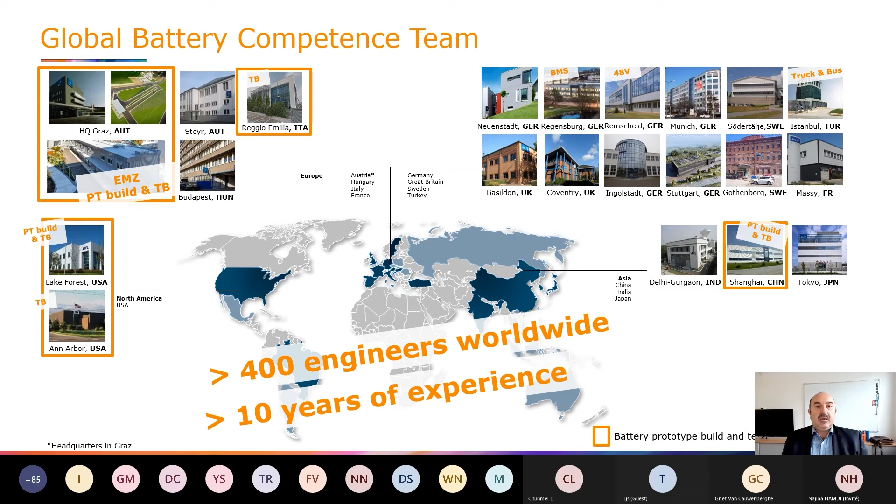Especially, the global battery competence team is spread nearly all over the world so that we can support our customers at close range. More than 400 engineers worldwide have been dealing with the development of electrical storage systems for more than 10 years, for all kinds of applications, but mainly focused on automotive applications, from two-wheelers to passenger cars and also commercial vehicles.

We can provide all the competencies that you need during a series development process of a battery system, starting from benchmarking and battery cell research topics, concept development at an early stage, different module and pack simulations, series development including battery management systems, and prototype build-up, as well as series production and cost engineering. That means we are able to deliver all elements from scratch to start of production for your battery system.

So now let's come back to the topic of today: what are the challenges and drawbacks that the automotive industry has to face in the 21st century? Of course, nearly everything is driven by the climatic goal. So I want to focus on the pathways to a clean and sustainable propulsion system that enables individual mobility in the future.

In terms of climatic and environmental goals, it is also important how we recycle and reuse the raw materials that are available only in a limited amount on our planet Earth. That is the reason why second life and recycling of components will play an important role in the future.

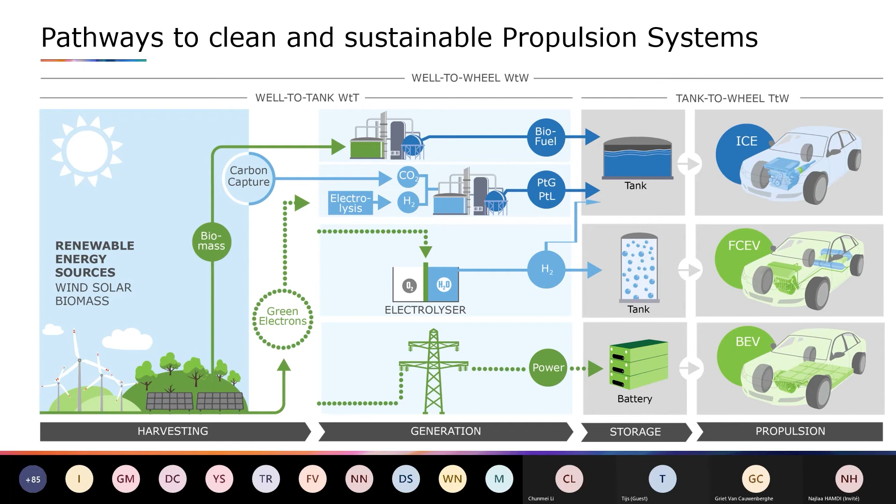After showing the demands, we will have a look at different topics: how to solve the requests of the public authorities. One of the topics will be the efficient usage of energy storage systems far after their automotive usage, in their first life.

Let's talk about the battery value chain. To do this, it is necessary to keep the entire life cycle of a battery in mind. It already starts with the raw materials and choosing the right chemistry.

It is not enough to just focus on the first life application, in this case the automotive application, but one must also consider the reuse or repurpose of the battery in a second life. Such a second life application could be energy storage in a family home, or in a battery farm of an energy supplier, to buffer energy in a power grid with decentralized production, for example from alternative sources like wind turbines or photovoltaic cells. If both seem not feasible, the last option is the recycling of the raw materials.

Large recycling facilities are established in Germany, Belgium, France, Finland, Norway and Sweden. Some work closely together with electric vehicle manufacturers. In order to stay competitive, standards that enable an automated dismantling process have to be set. Export restrictions on used batteries and the black mass are being discussed to secure access to raw materials for the European industry.

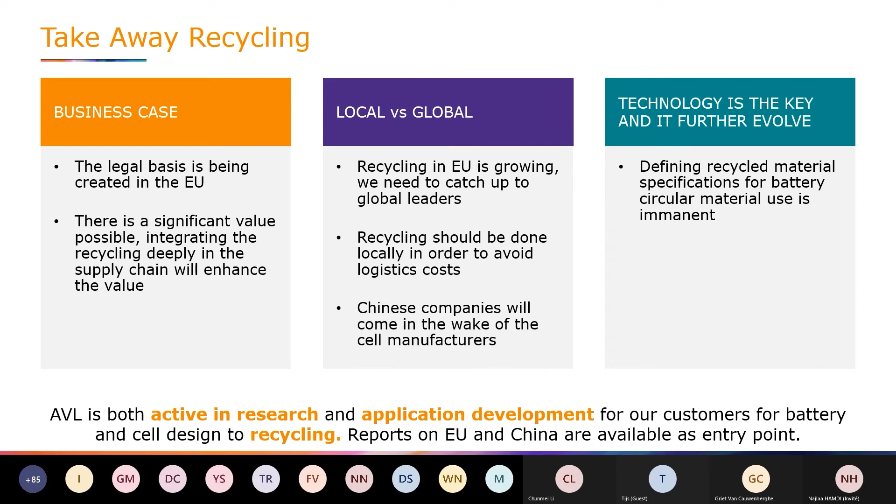In Europe, recycling companies will cooperate with the OEMs, and in China mainly with the cell suppliers. Specifications for recycled material have to be created. AVL is dealing with all these facts and is active in research as well as in real projects for customers. Reports on the actual situations are available.

So we have focused on the main challenges for the transformation of the automotive industry. After that discussion, let's now face the battery system and its complexity. To handle all these requirements is also a challenge.

If we take a look at the life cycle of a battery system, there are a few main stages. In the first life, there is an application in the automotive world. When the state of health reaches between 70 and 80%, the battery enters its second life, maybe in a battery farm for stationary applications or something else. In the end, it will be in the recycling process to bring all the raw materials back as efficiently as possible.

So the message is, we have questions to answer at all different stages along the battery life cycle, from producing the battery to recycling. We at AVL are involved in these activities and bring together these different worlds with our methods, testing and simulation.

Integration of different disciplines into a stringent engineering product with its large variety of requirements, depending on target markets all over the world, leads to a very high complexity that is not easy to handle. We have to deal with chemistry, electrics, electronics, thermodynamics, and of course mechanical design to achieve a product that can be used to reduce CO2 and play an important role in tackling climate change.

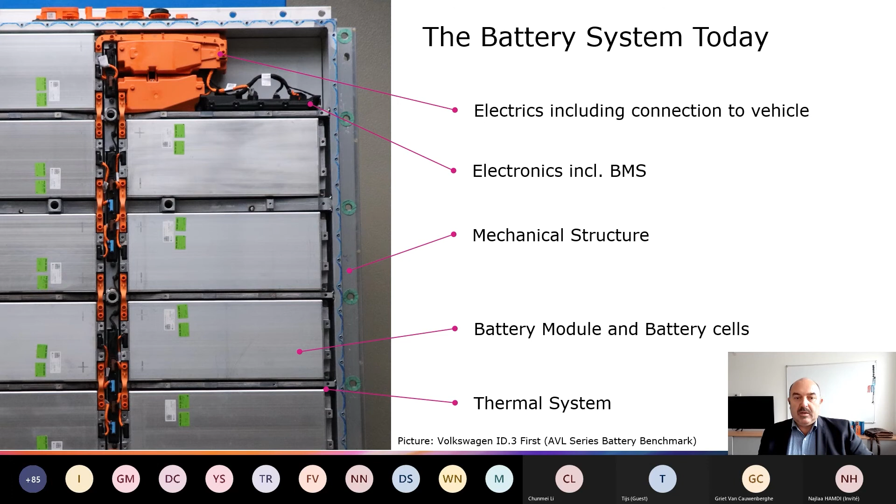Benchmark reports of these cars and batteries are available at AVL.

With the usage of solid-state electrolytes, we should solve a lot of the problems that we have with conventional lithium-ion batteries. We will be able to operate the batteries at higher temperatures. We expect higher energy densities and higher power capabilities. The lifetime and cycle times will be increased, and also safety issues will not be that dangerous anymore.

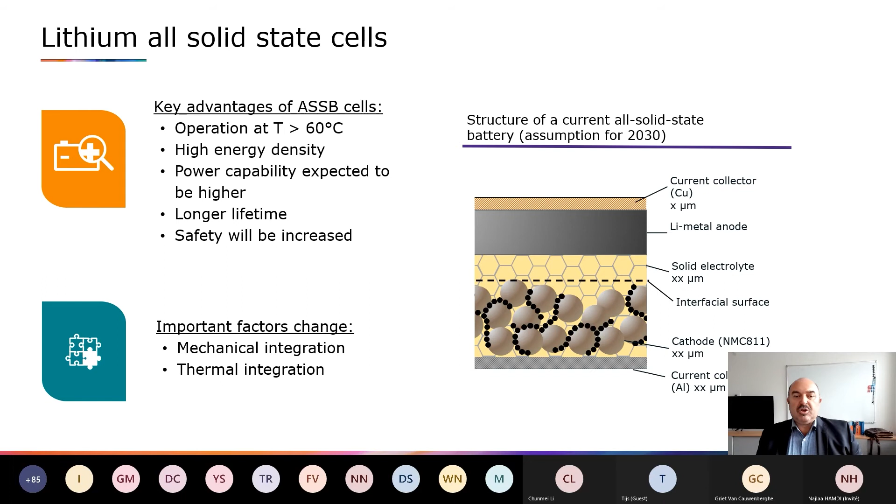But there are also important factors that we have to handle. We will face challenges in the integration of the cells, as well on the mechanical as on the thermal side.

With this technology change to all solid-state cells, we are facing some impacts on the integration strategy into a battery pack. Three topics I would like to mention. An increased breathing behavior will challenge us in the mechanical integration, as well as the pre-compression that we have to put on the cells. And as a third point, the higher operation temperature will challenge us in terms of insulation against the passenger cabin and sensitive parts in the car.

What can we do to handle this? We have to use different mechanisms, just like special compression pads, that can stand these strong volume changes in the cells. Of course, the mechanical fixation has to be strong enough to bear the pressure coming up by these breathing effects. Also, dynamical systems, mechanically or using isostatic liquid pressure, could be imagined, but seem to be much more complex.

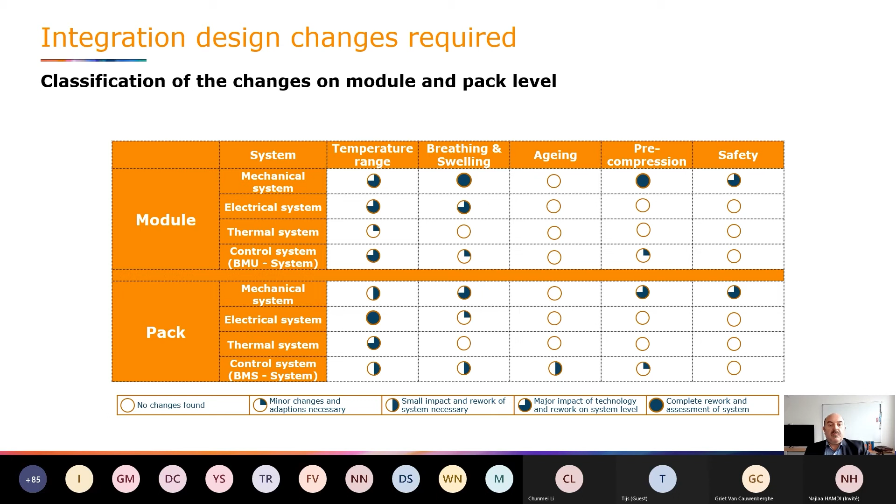So what can we take away as a challenge for the integration of solid-state cells into a battery? Solid-state cells offer different properties than conventional cells do, and so we have to adapt the whole integration process into an automotive application. As we described, a lot of changes have to be kept in mind to create the optimum operational environment. As the benefit, you will have the possibility to reach very high charging rates and high energy densities.

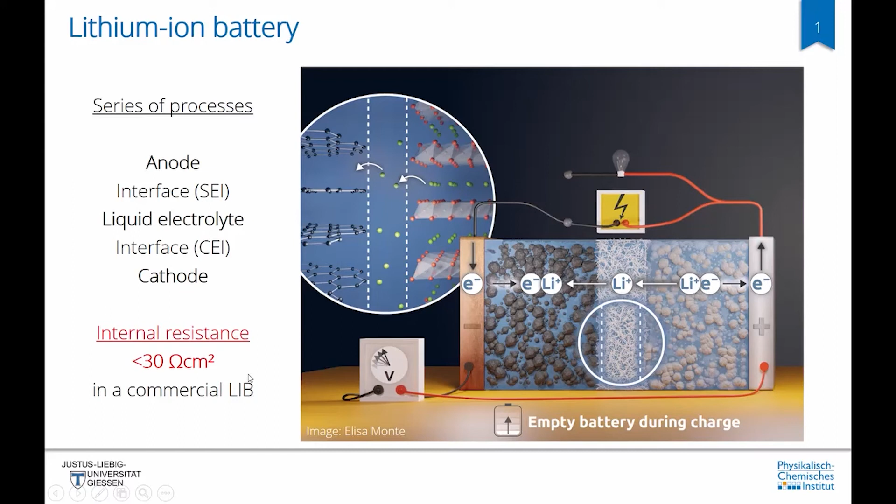First of all, of course, the lithium-ion battery, everybody is aware of how it is made up, but I would like to highlight the interfaces, which are key aspects in liquid electrolyte lithium-ion batteries as well as solid-state batteries. A value which is not always looked at so much is the internal resistance, which in commercial lithium-ion batteries typically is 30 ohm square centimeters or less, which means that if solid-state batteries are to beat this, the internal resistance needs to be as low or even better.

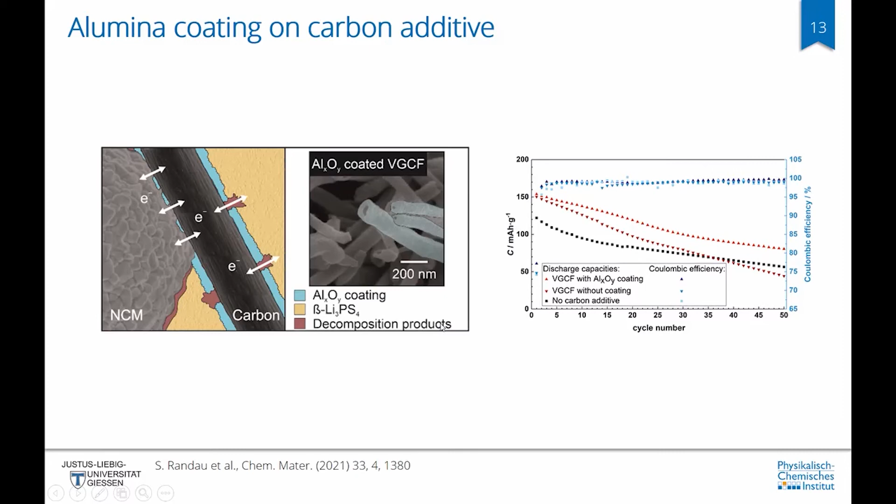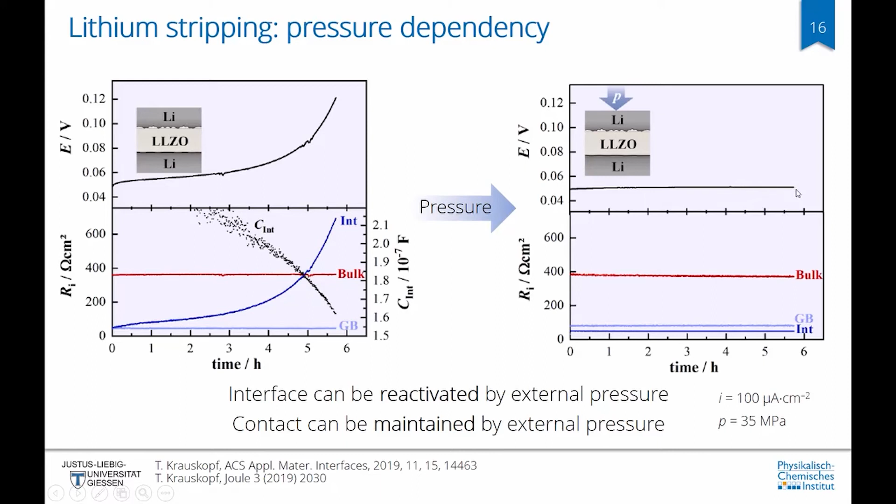Now, to prove that this is indeed mechanical separation, this can be reversed by applying pressure, and we re-obtain the original low voltage for lithium stripping, and this low voltage can be maintained by having an external cell pressure on the stack. Of course, the application of an external pressure is not ideal for applications.

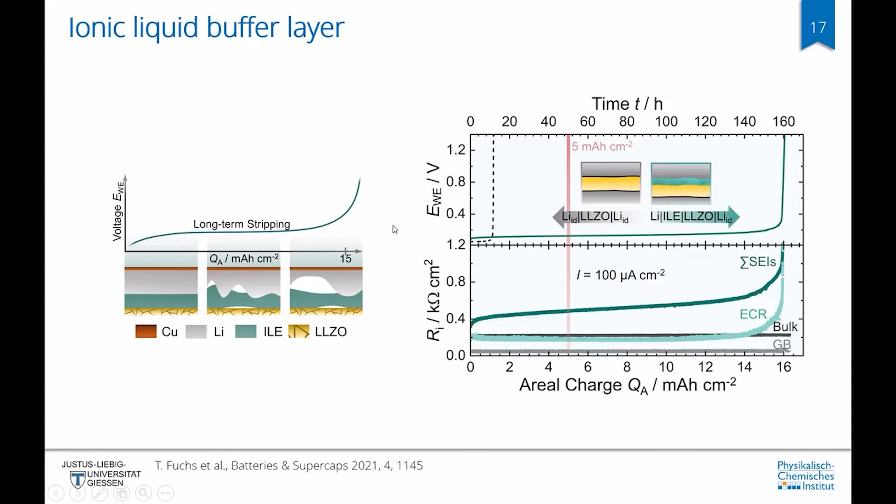Which is why Till Fuchs in our group investigated what could happen if we include an ionic liquid interlayer between the lithium metal and the garnet. He managed to show that the stripping can be much prolonged, up to 15 milliampere hours per square centimeter, when using this ionic liquid interlayer. Just to show the comparison here, on the left, this dashed line shows the cell with ideal lithium electrodes without ionic liquid interlayer, and the green line shows how much this can be extended, the stripping can be extended before the overpotential increases. With these results, we have a strong indication that hybrid systems will play a big role in future.

In summary, we have investigated the different forms of cell deterioration that can happen in a solid-state battery, to be the interface formation at the anode, dendrite formation, contact loss, and equally fracturing of cathode and contact loss and interface formation at the cathode active material, and propose as a view to the future that polymers can play a big role at these interfaces and as binders.

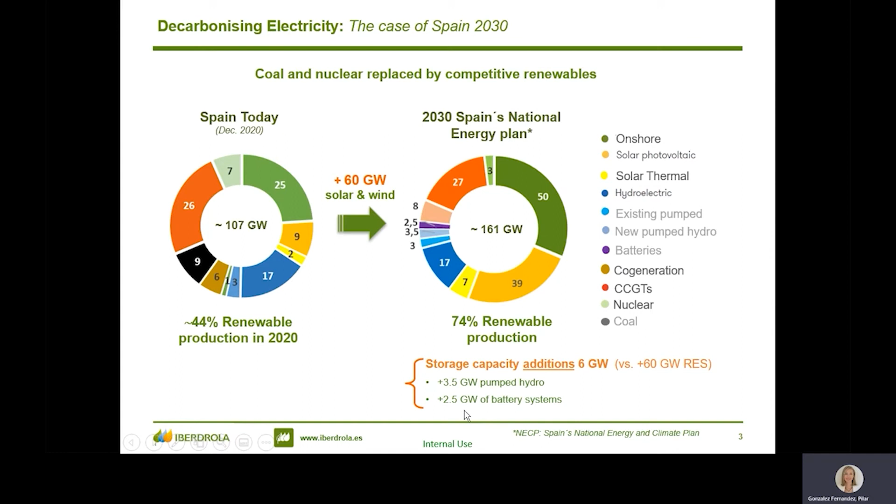And what is happening to lithium-ion battery demand? Well, this chart really explains it. We've plotted here the annual demand of batteries from 2017 to 2030, and the scale, which is the most relevant thing, is in terms of gigawatt hours per year. So it's a massive increase in battery production. And the reason behind this demand is the blue bar here, which are electric vehicles. So it's really the transport sector that is driving the demand for lithium-ion batteries.

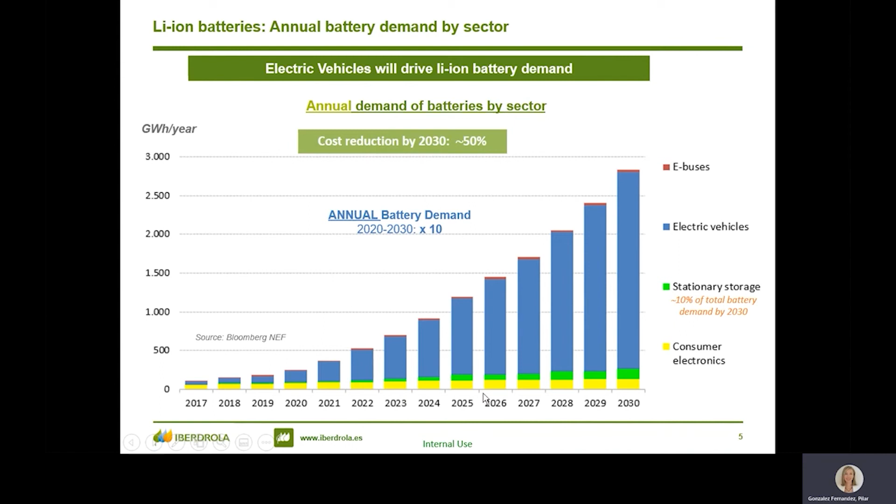Of course, batteries will be deployed in the grid by 2030 too - it's the green bars, stationary storage. Roughly this will be like 10% of the annual demand capacity by 2030 coming from the power sector. But although it looks very small here compared to electric vehicles, it's really quite large.

So what do we have in the power system in order to store electricity? We have different technologies, and the difference between them is really the different performance in terms of scale, duration, density, efficiency, and degradation. But in terms of large amounts, moving energy from one point to another in large volumes, there are only two technologies we can use today because of their maturity, efficiency, and cost - today, or perhaps in the next decade, like batteries. It's pumped hydro for long duration, more than 20 hours. It's a 100-year-old technology, very efficient, and it can be deployed at large scale.

And then we have batteries for short duration energy storage, below 4 hours. Today it's the most promising technology that we have. And it's in fact the quickest technology we have in the power grid, because batteries respond in less than milliseconds. So they are really the fastest technology that we have.

And where do we use these batteries within the power system? Well, really, we can use them almost everywhere, from the generation side to our networks, distribution and transmission wires, and also at our customers. But if we look closely into all these applications, we can reduce them into two, really: energy applications and power applications.

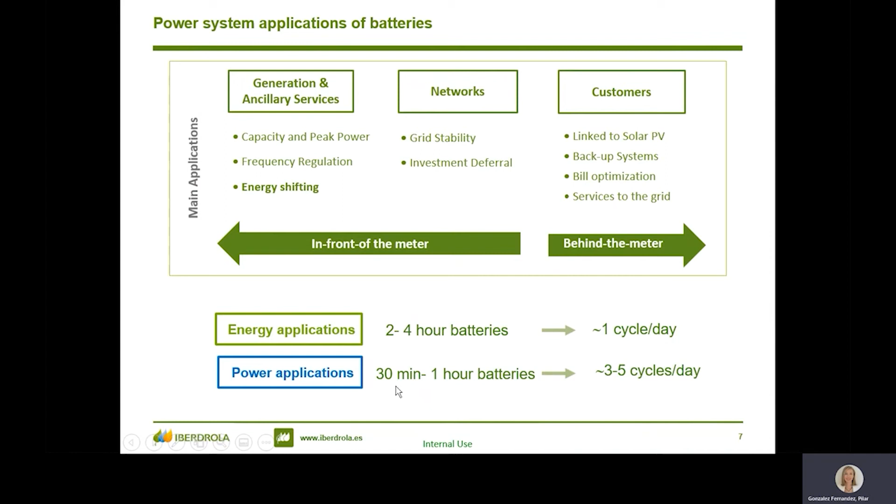So it's a great increase in demand for batteries. And this is just really the beginning, because beyond 2030, the share of renewables will increase and the need for energy storage will also increase. And of course, we cannot forget that despite electric vehicles, the batteries from electric vehicles go into another sector, they will actually be linked to the power system.

All these batteries are amazing. So when you add up the millions of the scale that is in terms of millions from the automotive industry, take for instance 15 million electric vehicles with a battery of 50 kilowatt hours, that takes you to an astronomical number of 750 gigawatt hours of storage capacity within those electric vehicles. So it's massive batteries that are connected to the grid.

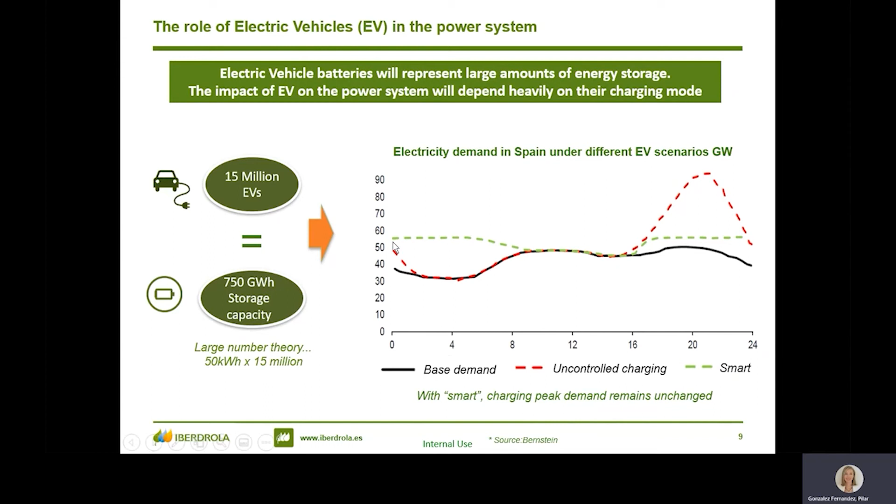And of course, we don't have here vehicle to grid, but it could also help in critical events for the grid, to take the power from those batteries back into the grid. But that will come in the next models from electric vehicles. So far, just by adjusting when and where you charge your electric vehicle, you just avoid any risks to the power system.

And let's take a look at what is happening in terms of technology. I'm sure you all know much more than energy companies do, but this is the way we simplify things. So what is happening in all these developments of batteries because of this massive demand is that we're seeing there is an interest in energy density, to increase energy density.

Also, we need to increase lifetime at the same time reducing cost. And of course, it has to be sustainable. So those are the developments that we're seeing in the battery technology.

But we shouldn't take for granted that depending on the application, we would need different performances from batteries. So electric vehicles would really demand great energy density cells and cells that enable fast charging. E-buses, on the other hand, are more concentrated on increasing life cycles. And for us, for power, for the power grid, for utilities, for stationary storage, we need a lot of life cycles, more than electric vehicles

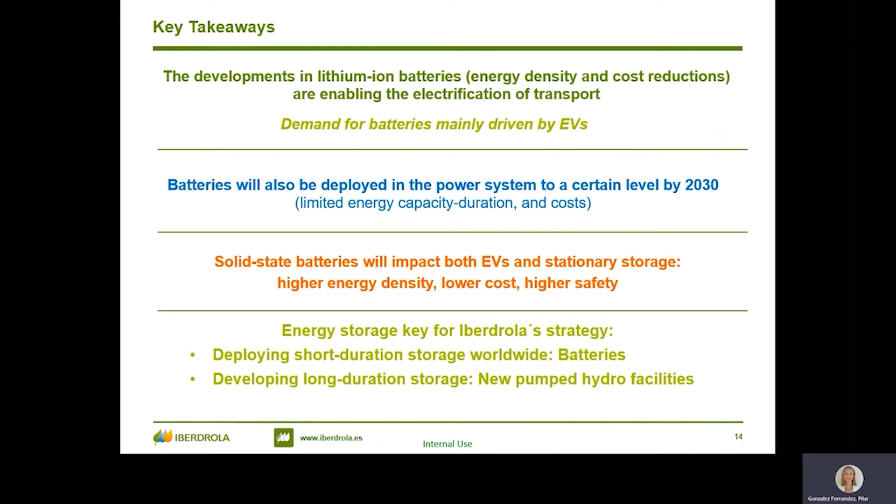And of course, for long duration, we cannot forget that we have this 100-year-old technology that is still evolving, and it's today by far the cheapest for long duration and for large amounts of energy storage. So thank you very much.

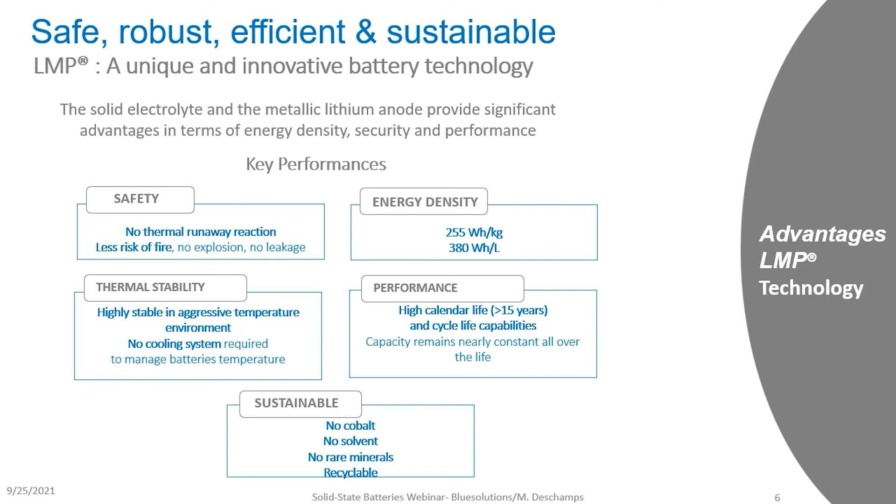Today, solid-state lithium batteries are universally recognized as the future of lithium batteries. Blue Solutions is the most advanced company worldwide in this technology and the first company to bring it to the market.

Made up of thin film using extrusion and coating techniques, this entirely solid electrochemical cell has neither liquid nor gel element and is a key component of the only commercial battery pack using a lithium metal negative electrode.

LMP is the assembling of only 4 foils. On the negative side, a lithium metal foil. On the positive side, a composite electrode made of lithium iron phosphate, carbon, and electrolyte. This cathode is linked to an aluminum current collector. Between positive and negative side, the separator, a lithium salt dissolved in PEO-based polymer.

Now let's have a look at the process to make cathode and electrolyte. First, we are making the cathode film. In Brittany, we are using extrusion, and in Canada, they are using coating.

The French process is represented here. A twin screw extruder is used to mix the raw material and melt the polymer. We obtain a foil after the barrel.

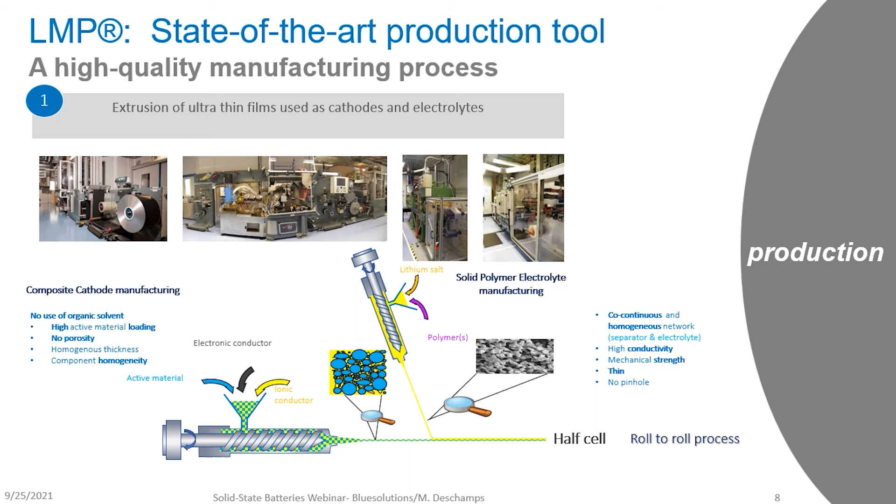To make this separator, we are using two different polymers, one for ionic conductivity and the other for mechanical strength. We need to make a co-continuous and homogeneous network, as thin as possible, but with no pinholes and homogeneous thickness. At the end, we have made what we call a half cell.

Let's go to the negative side, the anode side, the lithium side. I have to mention that parts of this process are not presented here. The raw material is lithium ingots.

The press extruder is used to make a film. The objectives are to obtain high lithium purity with no pollution. Thickness of 20 microns is the minimum we can reach today. Smooth surface and homogeneous thickness all over the roll.

After the film fabrication, it is time to assemble them. Lithium anode and half cell are laminated together, then cut and stacked. The electrochemical cell is made. By adjusting the laminate number, we can adjust the capacity.

Once we have the cell, they are connected in series and inserted in a sealed aluminum can. Electronic board and heater are added to create the module.

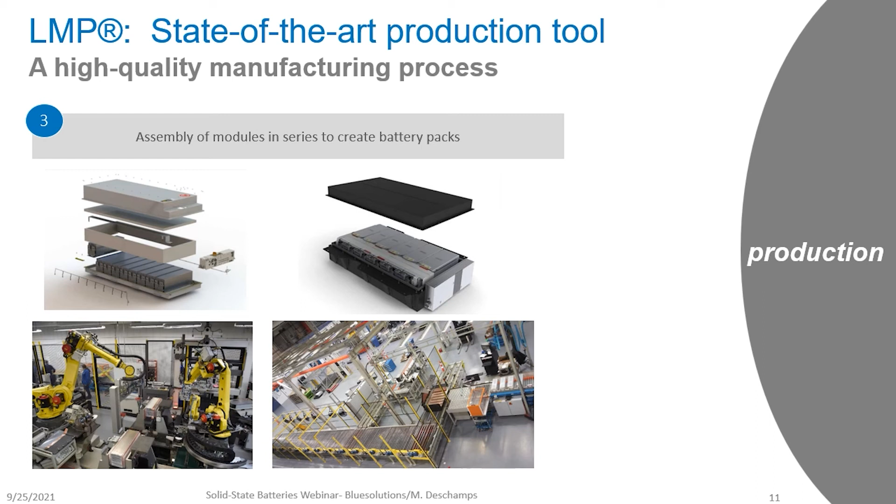LFP voltage is around 3.5 volts. We are connecting 20 cells to reach 70 volts for the module. After that, we connect 6 modules in series to make a pack of 400 volts, or 9 modules to make a pack of 600 volts.

To summarize, at Blue Solutions we start by transferring powder and finish by making pack and rack at a high level of quality. It seems easy, but moving from laboratory to industrial level is a long way with many challenges. Behind LMP and the original idea of Michel Armand, there is a lot of know-how, specific tools, and patents.

Today, Blue Solutions continues to focus its investment on boosting production capacities and R&D. We expect considerable investment in production capacity in Brittany and Quebec to support the expected growth in coming years. We will sustain R&D efforts to maintain our major competitive edge in the future generation of solid-state battery.

We have 3 main focuses for the next years. On the current technology, based on lithium iron phosphate and PEO, the main goal is to improve energy density. We expect to have a module of 9 kWh in 2025 compared to 7 kWh now. We are also developing a new generation called Gen 4.

I'm Steve Visco, CEO and CTO of PolyPlus Battery Company. Today I'd like to walk you through some of the challenges in transitioning solid electrolyte-based technologies to the commercial market. Virtually everyone has seen announcements like this announcing the end of the internal combustion engine. Although that hasn't happened, many auto companies have taken major steps toward introducing EVs to the commercial market. But along with these types of announcements, you've also seen things like the GM recall over the Bolt, due to a battery concern—fires. So safety becomes and has been a big part of electrification of transportation. Now that we're pushing for even higher performance, it raises the question: how do we develop the next generation of high energy density batteries without compromising safety and certainly without increasing cost? So many people have claimed that the future is solid state.

Polyplus is certainly working in this domain as well. So what about solid state batteries?

It's likely and almost certain that as we move to solid state, that will also involve a transition to metallic lithium for the negative electrode. And the reasons for that are obvious: lithium is 4 times the volumetric capacity density of carbon, and more than 10 times the gravimetric capacity density. So there's a big jump in performance if we can do this. In fact, if this is successful, that's kind of the end of the development of a negative electrode, because lithium is as good as you can get.

So as we move to the solid state, that necessarily means we're replacing liquid electrolyte with solid electrolyte. And that requires a number of key metrics. We need high lithium-ion conductivity at room temperature and hopefully below. This solid electrolyte should block lithium dendrites and be either thermodynamically or kinetically stable to lithium. And you want a low-density material, because otherwise this passive component will be adding a lot of weight to the cell, which you certainly do not want.

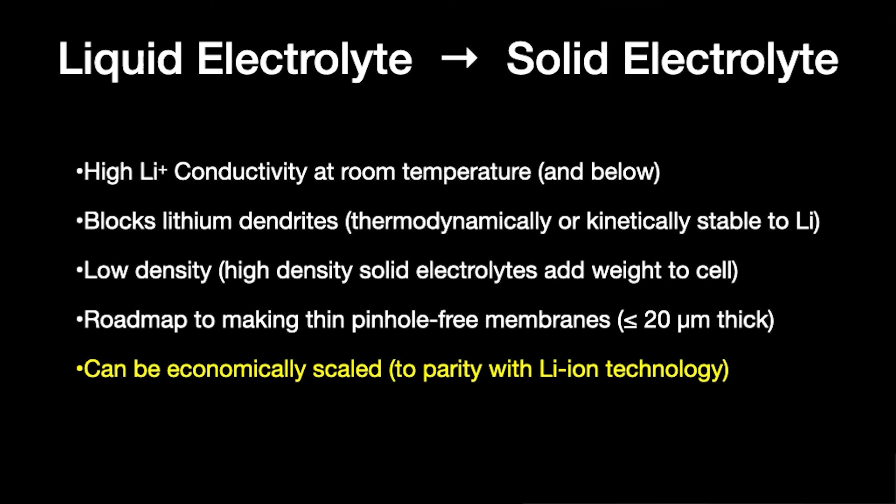There needs to be a roadmap for getting to very thin materials, hopefully below 20 microns, and they need to be pinhole-free so lithium does not short the cells. And obviously, ultimately, it needs to reach parity economically with lithium-ion technology. That's a big challenge. So let's look at some of the possible paths here.

Clearly, polymer electrolytes are one, and these are commercial lithium polymer batteries. It has a big advantage of being high-speed roll-to-roll manufacturing. Polycrystalline ceramics are getting a lot of attention; that's typically done through tape casting. And glasses are also a high-speed roll-to-roll manufacturing process. Anybody carrying a smartphone has a very thin glass display, and those are produced at scale at very high volume.

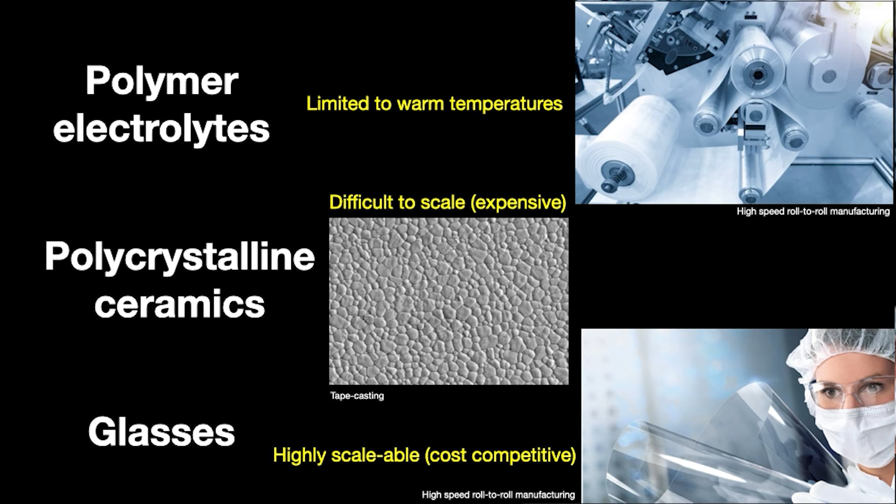So what are the downsides? With polymer electrolytes, they're typically limited to warm temperatures, right? The conductivities are not very good at room temperature and certainly not below. Polycrystalline ceramics have advantages electrochemically and mechanically, but this is a difficult technology to scale, and it tends to be expensive. Glasses are already scaled, so they scale similar to polymer electrolyte. So there are some big advantages to glasses.

So let's first look at polycrystalline ceramics, because Polyplus works extensively in this area. We work with a material known as LATP, lithium aluminum titanium phosphate, which is a water-stable solid electrolyte. So we can build lithium metal electrodes which can be fully immersed in water, and that allows us to build some very unique battery chemistries.

If we're going to take that to a rechargeable, the metrics change, the cost changes, but at this capacity density, the cost of the solid electrolyte is fine—it's economic in this range. It will change if we start talking about rechargeables. So this is still the most expensive component of the lithium seawater battery.

And the lithium seawater battery, as I mentioned, allows us to do some remarkable things, which is to build batteries at 2,000 watt-hour per kilogram, 1,000 watt-hour per liter.

Polyplus now has a pilot manufacturing line in Berkeley. We're about to launch this commercially. And we just completed deep water testing—we had our batteries at 13,000 feet in the ocean, very high pressure. But these are incompressible electrodes, so they do not need to be protected from those high pressures. We can do some pretty remarkable things there with the solid electrolyte-based chemistry.

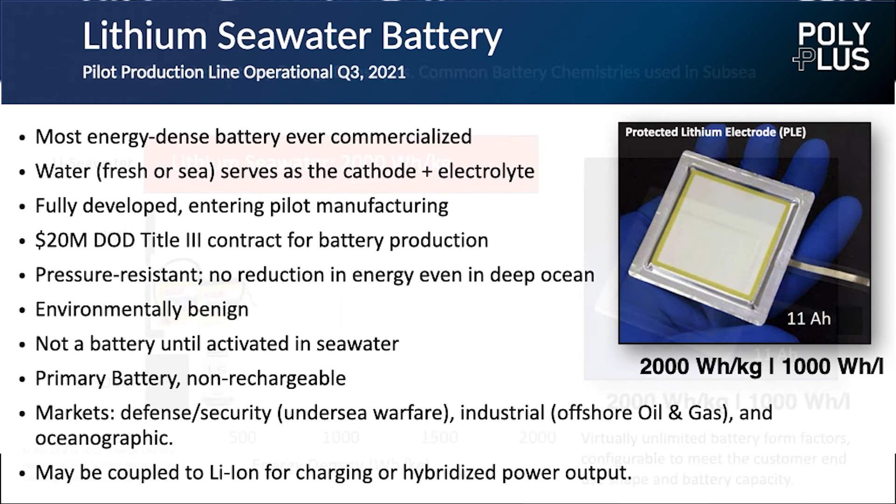If you look at other batteries used in deep ocean applications, they have to be protected from pressure, so their energy densities are vastly derated. Ours, of course, are not. They're not even close.

Lithium seawater, as I mentioned, has already demonstrated upwards of 2,000 watt-hours per kilogram and 1,000 watt-hours per liter, and we can probably push that a bit higher. So that is going to go commercial.

Let's get back to this idea of which solid electrolyte we're going to choose for a particular application. In the seawater battery, we have very high capacity density. When we move to rechargeable batteries, the capacity of the positive electrode is typically in the 3 to 5 milliamp-hours per centimeter squared. That's a very different domain.

It means that a rechargeable battery will require 3 orders of magnitude more surface area than what we're doing in, for instance, our lithium water battery. That means the solid electrolyte would then be 1,000 times more expensive. For us, that would be a showstopper, which is why, as we moved in the development path for rechargeables, we took a different path.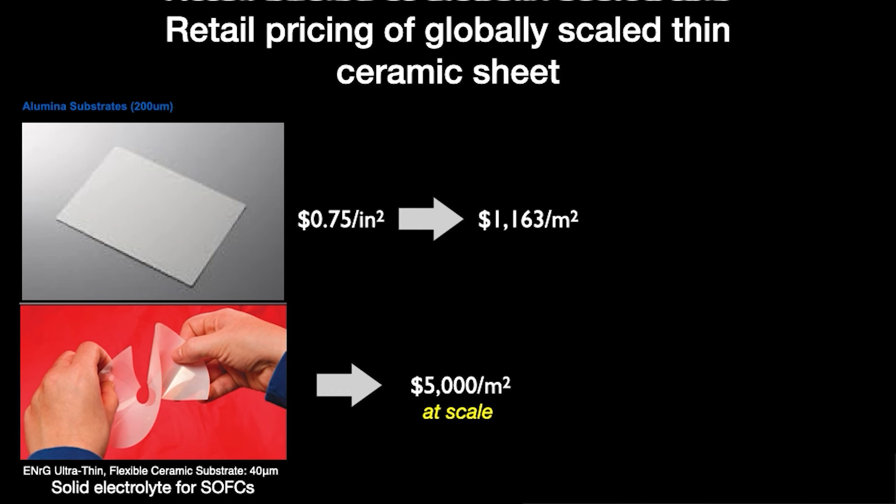We work with this LATP material - here you see a 40 micron membrane. We typically don't work with such thin materials because the seawater batteries don't need them. They're very expensive, so we don't see this as a path forward because of the scaling issues and the cost. There are other issues regarding dendrites too, but the cost issue is a big one.

Solid-state batteries have been around. Some work came out of Oak Ridge National Lab years ago, where they actually sputter deposit the battery - sputter deposit LCO, sputter a glass, and then deposit lithium on top by evaporation. Remarkably, these batteries were commercialized. Several companies did it at a commercial spec of about 10,000 cycles at 100% depth of discharge.

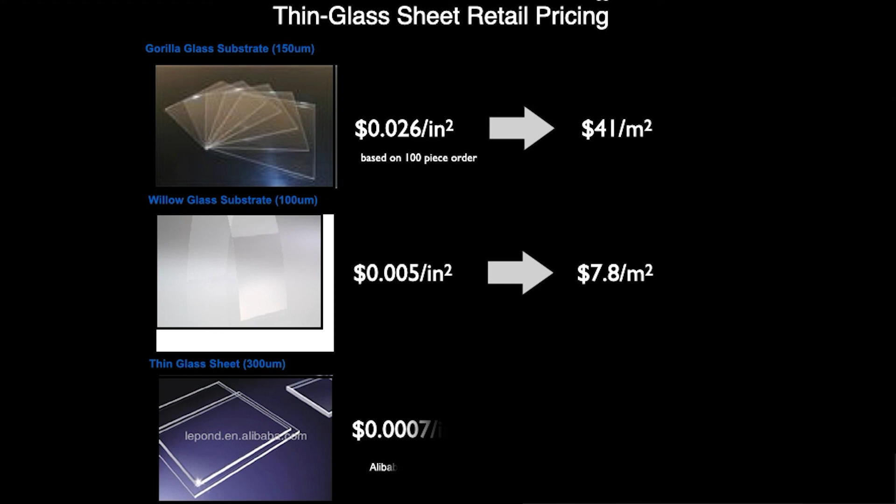If you go on Alibaba and look at Chinese glass suppliers, you'll see prices as low as $1 per meter squared. So these are certainly scaled at the kind of price points we're interested in for commercial batteries.

The conductivity of sulfide glasses is very high. Even at minus 20 C, the conductivity is at 10 to the minus 4 Siemens per centimeter. These materials are sufficiently hard to stop dendrites. In fact, the elastic modulus of this glass approaches that of oxide glasses, so these are strong glasses.

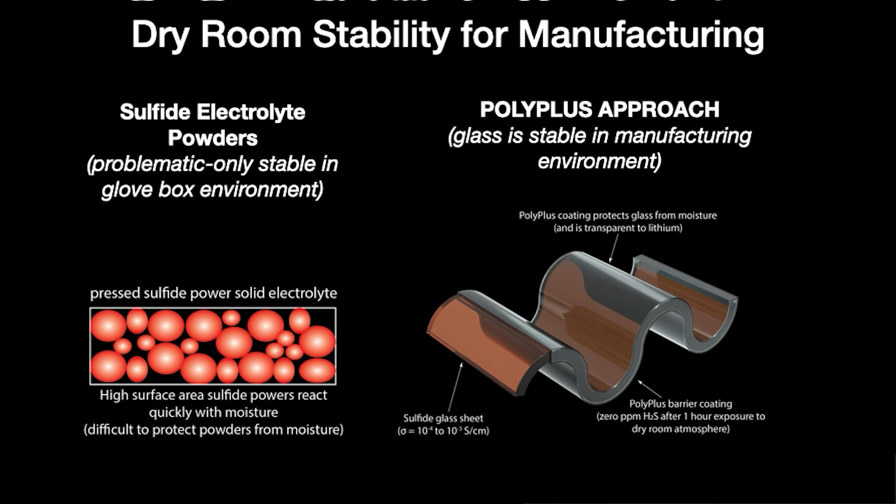We've also developed a process to stabilize these glasses against dry room environments. If you look at the Toyota approach, where high surface area sulfide electrolytes are compressed with either anode or cathode materials, it's difficult to protect those against moisture because of the high surface area. But we have ribbons of material which can be coated very simply. We use a barrier coating which is transparent to lithium but blocking to moisture. So we have that process in-house.

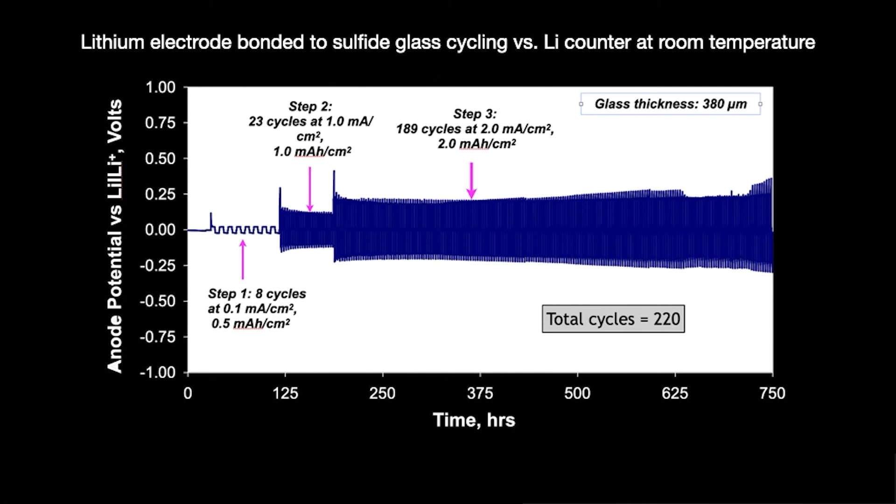We cycle these. Most of these glasses have been cycle tested in small cells, and we're getting ready to do larger cells. You can see here that after 200 cycles, the cycles basically fall right on top of one another. Here's some extended cycling of a 400 micron thick glass - you can see it's very reversible, and we don't see any evidence of dendrites.

We also cycle these glasses against NMC 622. We see very good capacity retention there as well.

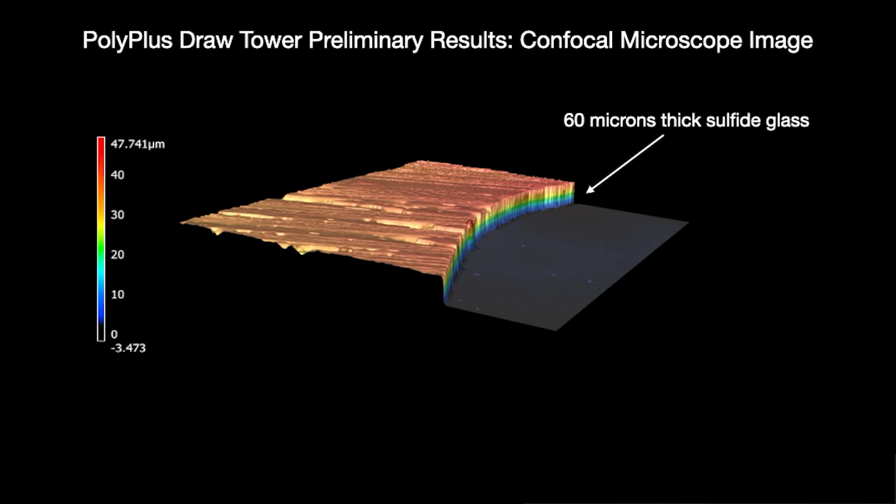If we look at the glass coming out of the draw tower with a confocal microscope, you can see that we very quickly get down to 60 microns, and pulling a little further, we're in fact pulling glass down all the way to 15 microns thick. That is an ASR of about 2 ohm centimeters squared.

So the end goal is to commercialize the material in a form like this, where we have sulfide glass, very conductive, coated with a thin layer of lithium metal, which is then used to build next generation batteries. Each one of these processes, including putting down the lithium, is economic, so we think ultimately we can get to parity - but of course, you never start there.

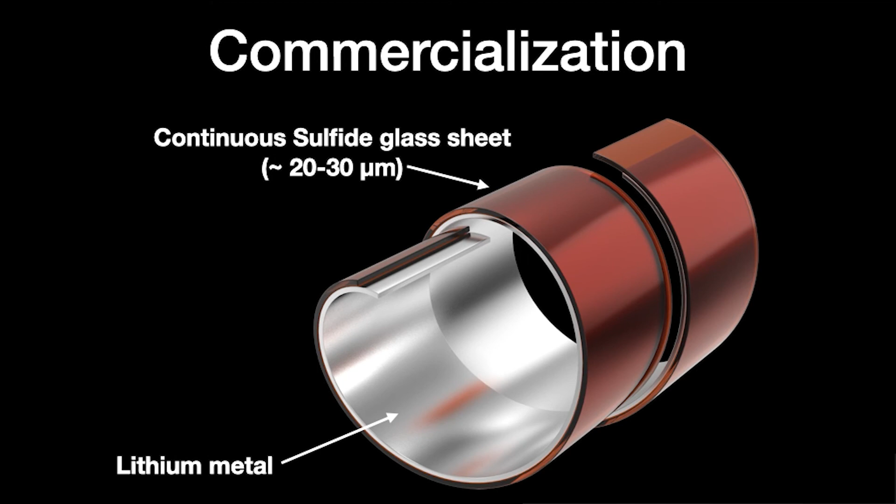So I'd be happy to answer any questions, and that I will end my talk right there.

So I think I don't need to emphasize the importance of solid-state battery and how much interest we have received so far from both academia and industry. But from this worldwide battery target roadmap, I just want to emphasize several programs, including Battery 500 in the US, Made in China 2025, and Rising II in Japan, not to mention the Integrated Strategic Energy Technology Plan in Europe. As you can see on the right-hand side, all solid-state battery technology is just one of several being discussed. So if we look at the different technologies, they have different future trends.

Battery usage is really application dependent. Here we mainly focus on lithium-ion batteries initially, and especially electric vehicle applications. From state of the art, we gradually move to high nickel versions like NMC 811, NCMA cathode materials. We also have silicon anode, and so the composite anode. There is another direction, which is to go to solid-state batteries, including both polymer and inorganic choices. Lithium metal anode is also a very important component. These technologies are not exclusive to each other, so a solid-state battery could go with a silicon anode or lithium metal anode.

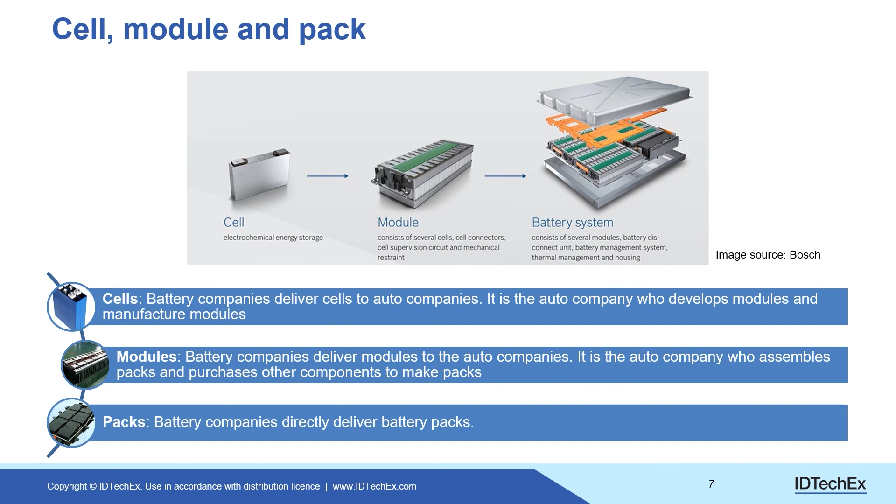Coming to the commercial area, we always ask: where is solid-state battery? From the technology readiness level, most startup companies and battery companies with divisions working on solid-state battery are mainly in the technology development stage, early pilot, and scale-up stage. From basic research and development to mass production usually takes several years. Most companies are mainly in the sample line, R&D stage, and test pilot line. That is why we wouldn't expect mass production to happen before 2025.

In terms of cell manufacturing, there are lots of options. A really important consideration is compatibility with existing facilities, because that affects cost and complexity. For instance, the anode material usually involves handling of lithium metal.

Both procedures add complexity and create challenges compared with lithium-ion processes. In addition, because we probably don't really need formation and aging processes for solid-state batteries, some manufacturing procedures could be reduced or even omitted. But from lab to fab and to mass production, there are lots of details we need to consider. Cost reduction, yield improvement, and quality control are also important factors.

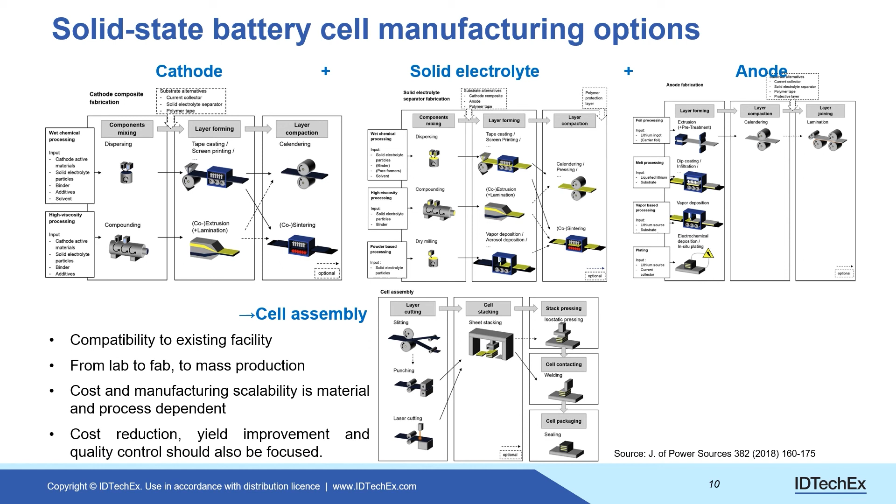There are different choices in terms of technology and procedures, because they are really technology and chemistry dependent. For instance, you may need really high temperature for the sintering process for oxide electrolyte, while for sulfide-based electrolyte, inert gas conditions may need to be applied. That is why we think it's really important to give an analysis of the different technologies.

If we look at the different value propositions of solid-state battery, we talk a lot about energy density, because of the possibility to use lithium metal anode and high voltage cathode. Of course, safety is a really attractive factor because we don't really use flammable organic electrolyte. Although for polymer solid-state batteries, it may not be the case - the safety could be improved, but there are still some flammable components remaining.

Because of eliminating the capacity loss process, it is possible to increase cycle life. And of course, people may talk about the potential low cost because some components could be reduced or removed. Flexible design is also a really important consideration, both for non-electric vehicle applications like consumer electronics, and in series and parallel configurations. But in the meantime, there are also lots of challenges.

For instance, if we just replace the electrolyte, as we discussed before, it's not necessary that we get a better energy density. Most solid-state batteries, because of higher internal resistance and worse interfacial compatibility, have charging speed that could be difficult to improve. Although we can see some players have demonstrated 80% capacity after a 15 minute charge.

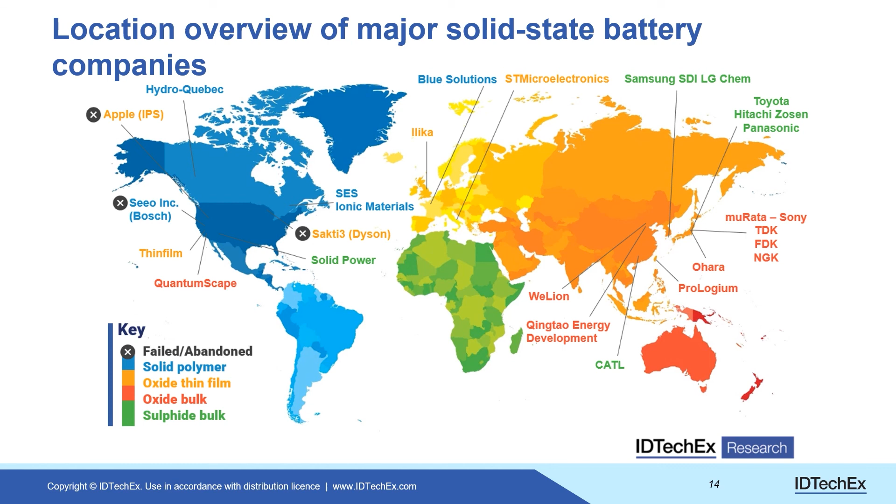Here you can see lots of players working in the solid-state battery area globally. Although some players have abandoned the technologies, others gradually move to alternative technologies. There are also some companies, for instance, that move from sulfide-based to oxide-based. In general, we can see lots of recent activities with different companies in this area.

The general message in this area is we can see a growing number of collaborations, partnerships, and joint ventures. The major targeting application is electric vehicles, although other applications may become easier to realize. So here we can see the key takeaways include the technology trend, challenges, and also market trends.

Because this is a really short presentation, if you are interested in more details, we have a report on this topic, and I'm also happy to discuss any questions with you. Thank you so much.

Thank you very much, Xiaoxi, for this comprehensive view around solid-state battery technology. In your opinion, how the most likely business model around this technology could be? I mean, who will dominate the solid-state battery commercialization? Will it be current lithium-ion battery makers? Will it be startups? Will it be a collaboration or partnership between automotive manufacturers and these small startups? What is your opinion about this?

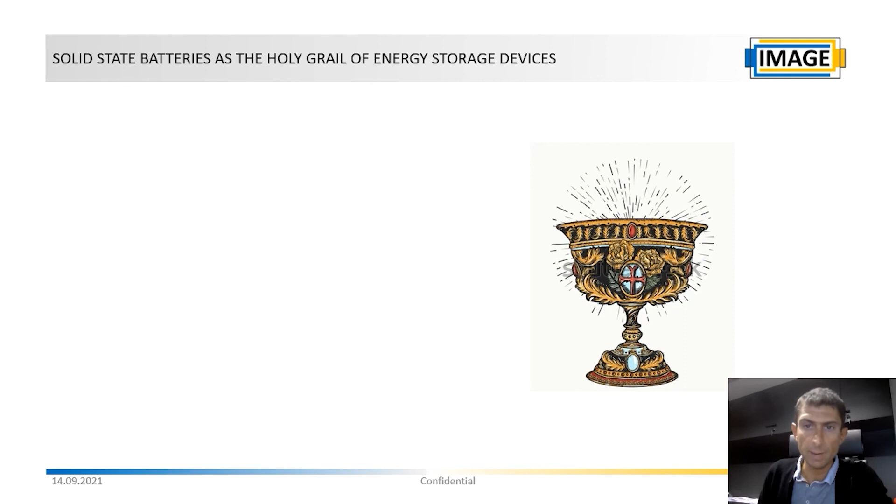Solid-state batteries are still seen today as the holy grail of electrochemical energy storage devices, for which all the desires in terms of market indicators can be fulfilled at once: high energy and power densities, long operational lifetimes, low cost, and no issues related to safety. This is the most recurring dream for battery manufacturers that could become a reality with the manufacturing of solid-state batteries.

In short, when we talk about solid-state batteries, we refer to the possibility of replacing the flammable liquid electrolyte of standard lithium-ion batteries with thin solid films that also enable the use of high specific capacity anodes such as lithium. Thanks to this, we can expect better performance mainly in rate capability, energy density, and safety. But the reality is somehow different, and up to date, at least, I'm not aware of any commercially available device with this technology that outperforms the standard lithium-ion batteries we can find today.

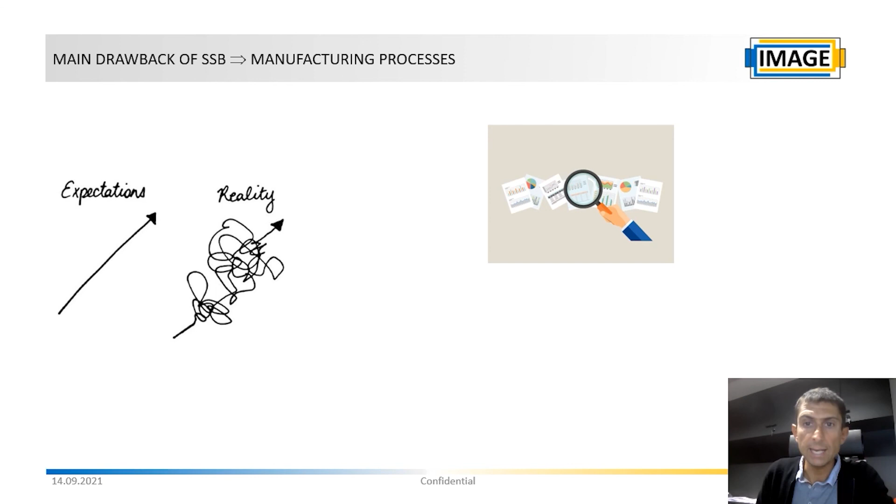We'll see what the future brings. It is true that the development is still in a very early stage, but in any case, any competing technology will have to be evaluated or benchmarked against existing ones in terms of performance, manufacture, and scalability to fulfill market demand and price.

So far, the fabrication of this kind of device is the most limiting factor, since performance and cost are supported by the very active research and development on novel materials with better electronic and processing properties. In contrast, there doesn't exist an industrial manufacturing technique able to produce the gigawatts we would need for either mobile or stationary applications. I don't want to get into too much detail with this.

The important issue here is that it doesn't really matter what the electrode is made of. Every material has its positive and negative features, but the fabrication process has to be somehow consistent and independent of the kind of material. And how does this process have to be? Well, that's what I'm going to talk about today.

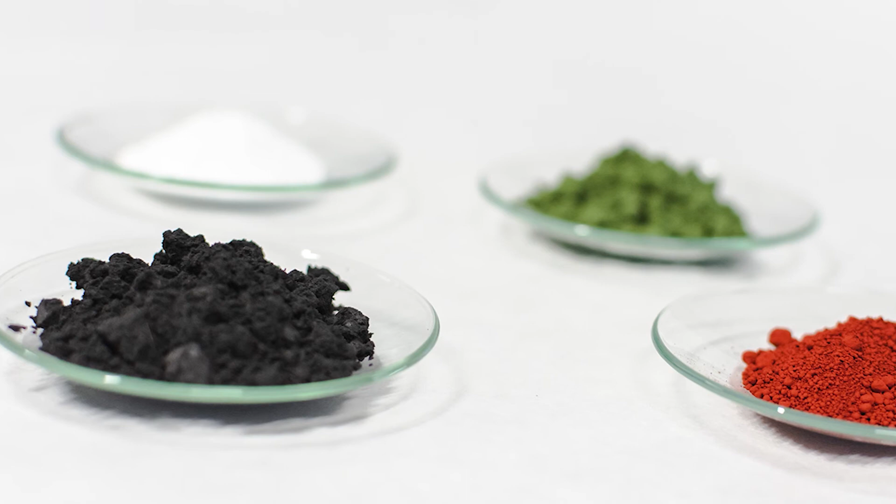These are some of the properties or features that the process has to show if we want to fulfill the expected demand for batteries in the coming years, especially for the electric vehicle. And of course, at a very competitive cost and sustainable, not only environmentally, but also from the social point of view. I'm referring to raw materials mining and extraction, and also the working conditions of employees along the full value chain.

Taking all these issues into account will give us the roadmap for competitive manufacturing of the battery of the future. This is the methodology we have used to get to that point.

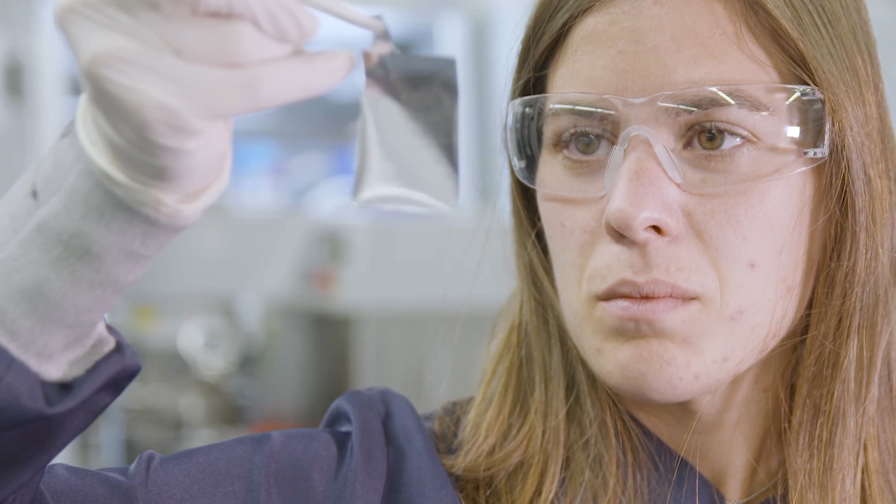First, a review of all potential manufacturing techniques that could be used for the fabrication of electrodes and electrolytes. Not only techniques being used today, but also fabrication techniques used in other fields that could in principle be transferred to the battery world.

Then we will apply a first filter attending to material, product and production requirements. This is how the process should be from these three points of view, what we would like or what we expect. This will give us a fair picture.

Then we will define some additional features that could or should be improved for the resultant techniques from the previous step. And finally, we will be ready to validate and verify against legislation and regulations.

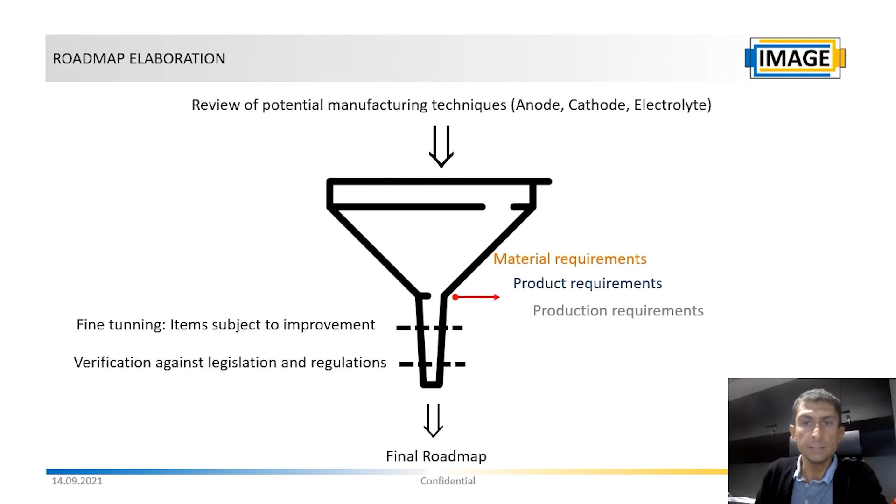The next step is the most important one: what kind of restrictions and/or limitations we fixed from the material, product and production point of view. The selected process, in this way, doesn't have to affect the stability of either the active material or the substrate.

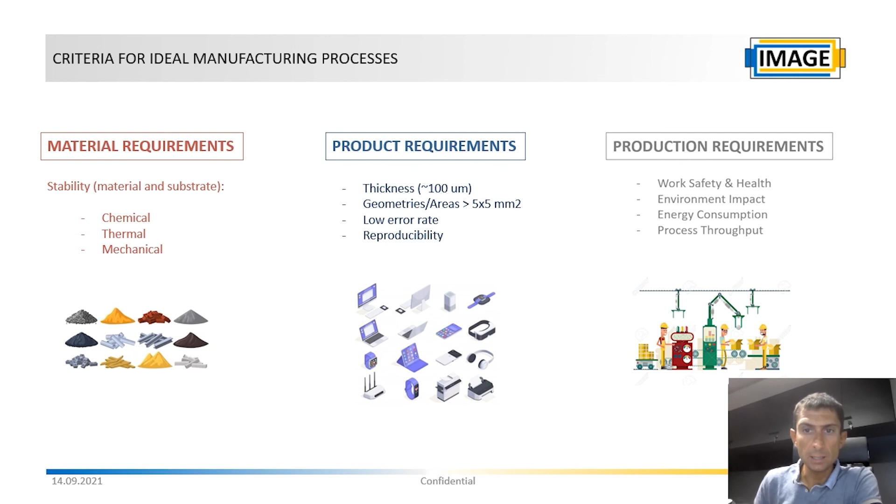It has to be able to produce thin films of a given thickness uniformly across relatively large areas, with low error rate and high reproducibility. And finally, the process has to be safe and sustainable in terms of what we said before.

If we apply these filters, we can rule out a large number of techniques and focus on the remaining ones. If we go deeper into these remaining ones, we can somehow order or prioritize them as a function of the requirements we had previously defined. First, we plot the ones we have already discarded, to have them also as a reference. And from here, we can suggest three different parallel or even complementary approaches.

First is wet or solution processing, with some drawbacks mainly regarding safety and environmental impact. We'll see how to solve them later. Aerosol coating has more or less the same drawbacks as wet processing. And extrusion, which is one of the most promising attending to this criteria.

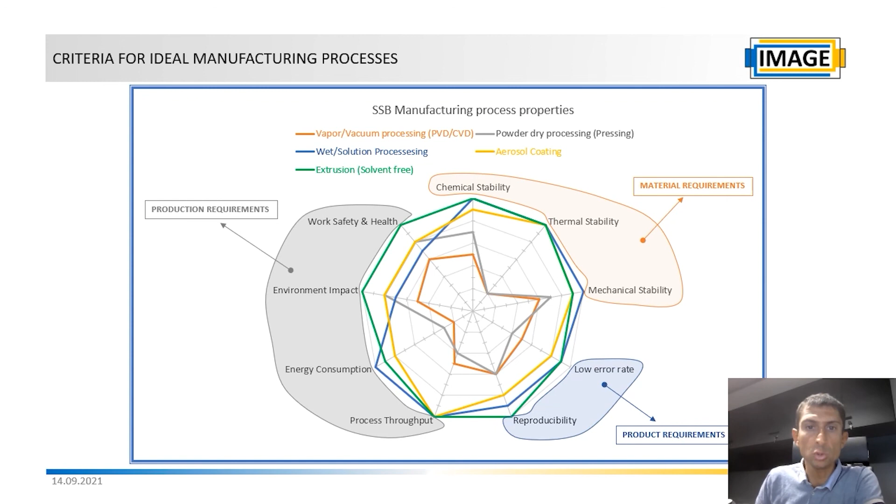These three approaches are summarized here. Aerosol coating is also somewhat penalized by the very low TRLs. It's very incipient, and extrusion is supported specifically because it's solvent-free.

How can we improve this? What else can we demand in order to distinguish between them? This is the fine-tuning we talked about at the beginning.

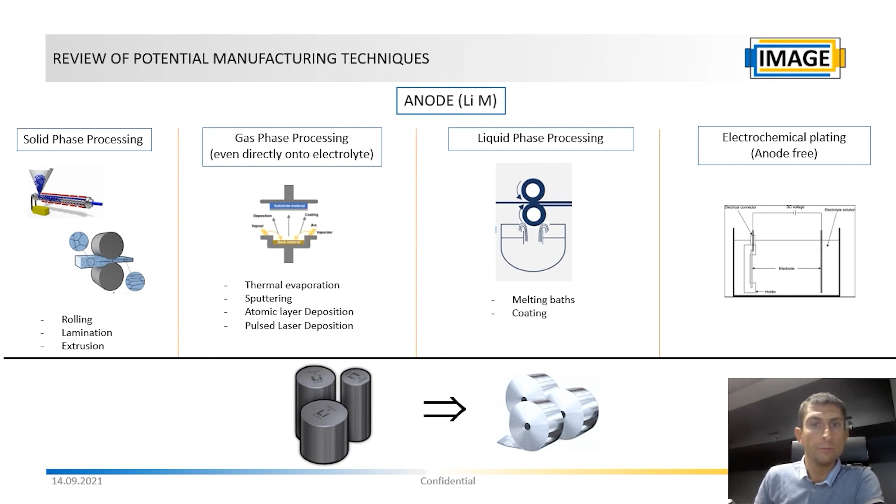At the anode, the situation is very similar, but I didn't want to include it in the analysis because in theory, you always have the possibility to start from lithium foil without minding how this lithium foil is processed from the ingot. So in summary, even in the short term, we can already exclude some of the potential manufacturing techniques according to material, product and production requirements, and focus on three alternatives.

Co-extrusion is a very promising approach for the mid and long term since it doesn't make use of solvents, while for wet and aerosol spraying we would need additional developments to make active materials soluble or dispersible in green solvents and eventually water. I put active material functionalization here and here, but it's very important to remind that it's exactly the active material functionalization that enables wet coating. Nowadays, most of the efforts are focused on making oxide and sulfide electrolytes soluble or dispersible in organic solvents in order to be able to wet process them.

At the anode level, lithium metal will be, without a shadow of a doubt, the preferred material in the short and mid-term, mostly processed from solid phase from the ingot, mainly extrusion and lamination, but it's also very promising the electrochemical deposition of lithium thin films from the ingot, and even the so-called anode-free approach with in situ electrochemical lithium plating during the first formation cycles of the battery cell. Other approaches, such as wet coating, will perhaps be possible, providing the development of new alloys or composites other than lithium with also large specific capacities.

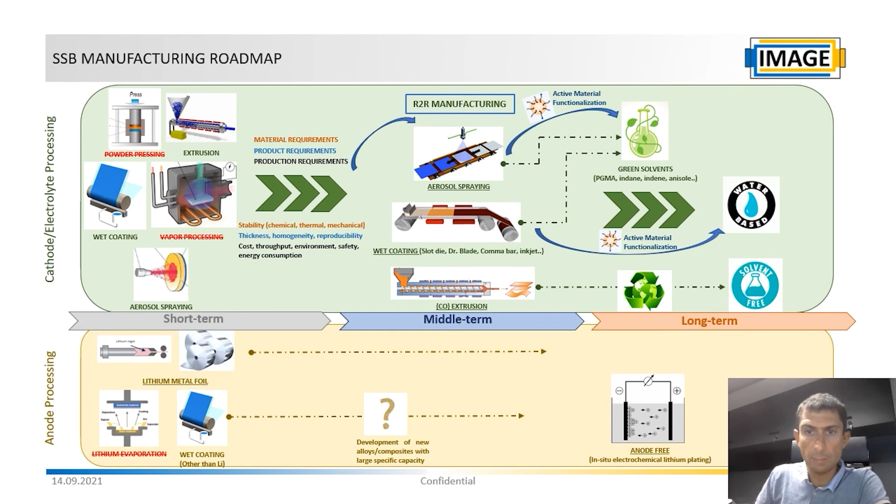And last but not least, something very important I don't want to forget is that there will not be a definitive manufacturing technique. There might be more than one, and this can even be driven by application.

Here you have some market applications for which solid-state batteries can find commercialization. Their adoption is more likely to start with applications that don't require much energy and can therefore be relatively small, and we should also take into account that some features may not be very relevant for some applications but be very important for others. Cost and power density can, for example, not be the defining criteria for medical implants, but be very important for stationary and automotive applications.

This will define, up to a certain extent, the manufacturing technique. It's in this way perfectly possible to fabricate small devices by vapor deposition, as Ilika, for example, is doing, but consider wet processing for larger area devices, as Ilika is also doing.

And I didn't want to finish without looking at what the main players in the field of battery manufacturing are doing nowadays. This is a small compilation which also somehow validates the roadmap we have presented, since, as you see here, most of the players are already considering wet processing.

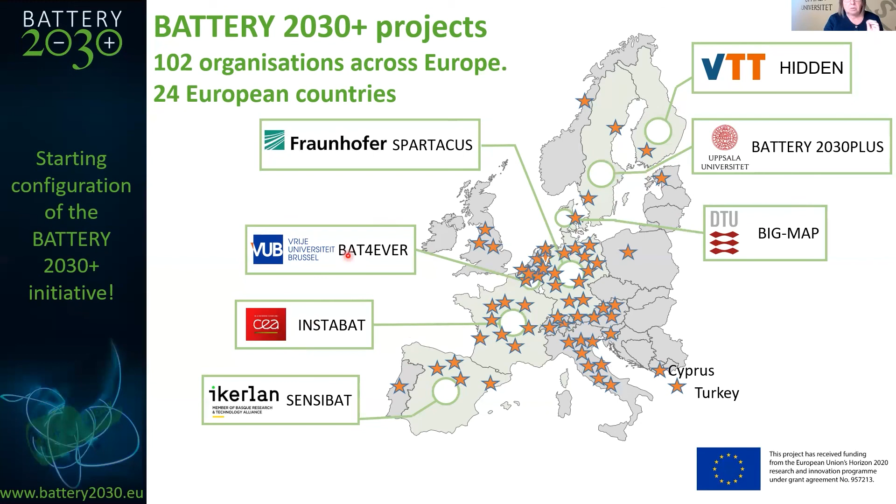In this coordination support action and supporting organization, we have collected some of the largest partners, not all unfortunately, because funding is too little, spread over Europe. We also have a number of associations and organizations supporting, following, guiding and criticizing everything you need to make this kind of large-scale initiative functioning and working.

We are targeting all kinds of batteries. Of course, the transport sector is the driver, the mobility, but we also see that the grid and frequency regulation and large-scale storage comes up more and more, and also discussion of second use of batteries. But we should not forget portable electronics, medical devices, and new applications coming up for batteries. So we think addressing all these applications with transformative ideas instead of incremental research.

So by making a roadmap where we actually have a chemistry neutral approach, we want to accelerate the discovery of interfaces and materials and smart functionalities, sensing and self-healing, and always have cross-cutting areas like how would you manufacture and recycle the things that you put up in your ideas and the projects we're now running.

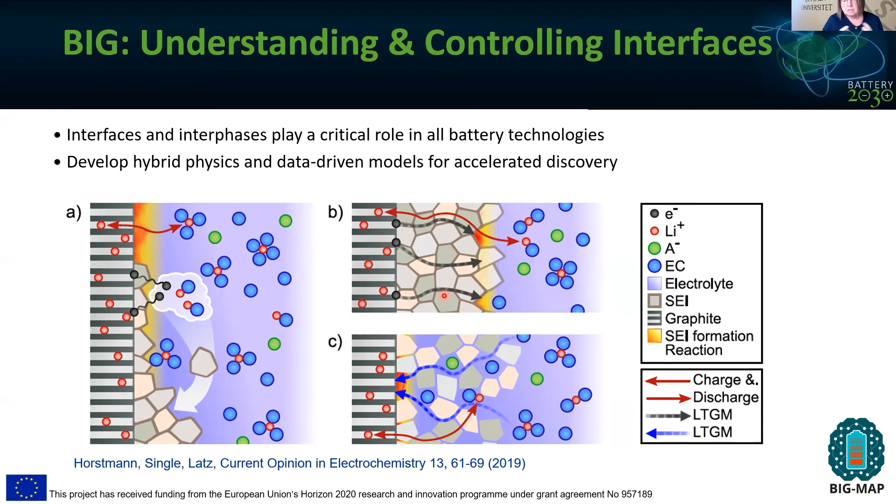This is something that is really targeted by developing hybrid physics and data-driven models. And here we have lots of new interesting discussions between experimentalists and theoreticians. We just had our annual meeting with 130 people involved, and it was very interesting to see how these really strong experts in Europe from the European Materials Modelling Council helped us, as experimentalists, get good ideas on this. So this is sort of the loop that BIG-MAP tries to target in this space.

Then we operate on characterization of battery interfaces, to databases, to computational design of battery materials, rather than the traditional Edisonian way of starting with a model, trying to make the compound, then going back to the model and saying that was wrong, you have to redesign it because you can't make the material, etc. Instead, we learn from machine learning and from all the data we collect and share in these big databases we're putting up.

And the goals, if you look at the roadmap, what we are expected to achieve by 2023 is a shared FAIR data structure. Just putting that up is a thing in itself. We have just published the largest data management plan you can find in the literature, published as a scientific paper. To have simulation, code scales, and experiment, you need a common ontology, and we're building that up with something called BattINFO.

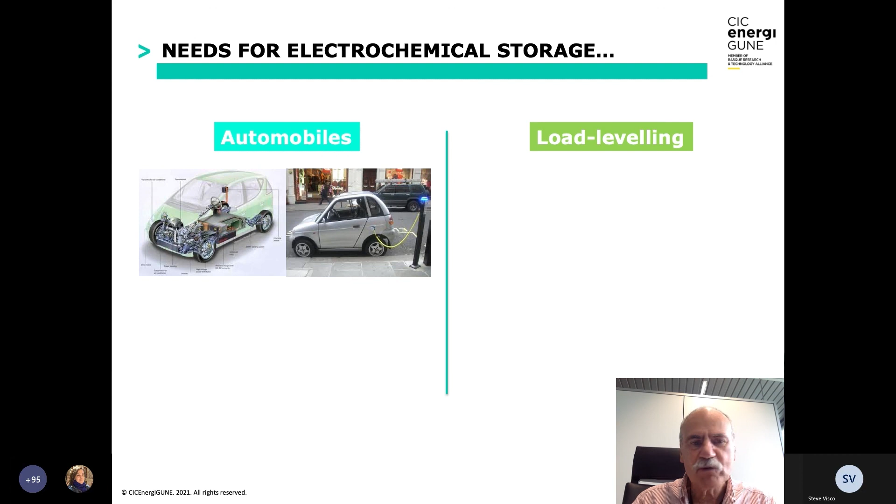If you speak of the need for electrochemical storage, you will need big batteries for automobiles and for load leveling. Electric automobiles use batteries of about 50 kilowatt hours, while load leveling involves 1 megawatt hour units, much bigger. If you imagine 1 billion cars on the road and you want to turn 10% electric, you're going to need 20 million tons of batteries. It's even more striking for grid storage, where storing only 10% of daily electricity would require 60 million ton batteries.

If we think of batteries according to chronology, they started as lithium polymer batteries with an intercalation cathode and metallic lithium. They are solid-state batteries working because the electrolyte needs to be warmed up to above 60 degrees to become conductive enough. Then came lithium-ion batteries after 1991, where a liquid electrolyte is used between two intercalation electrodes, graphite and something like NMC, operating between minus 20 and 55 degrees, where you start to have safety problems. And what is the future of batteries?

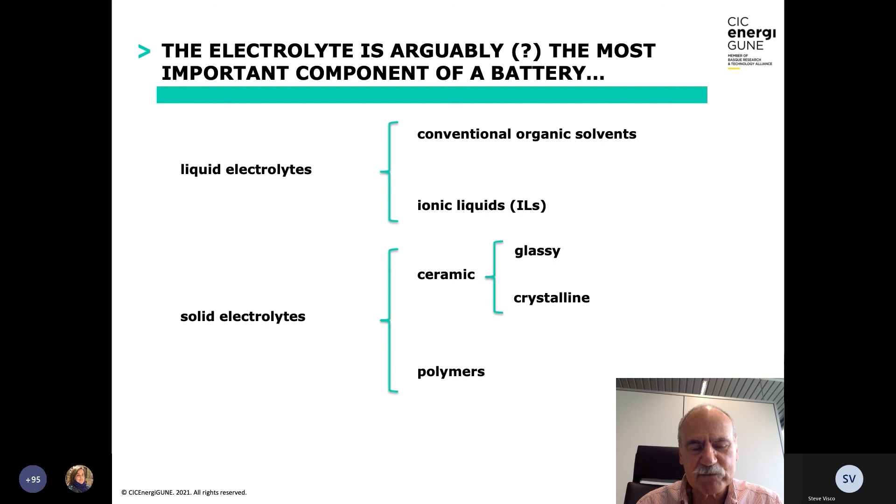We could say that arguably the electrolyte is the most important component of a battery. For systems using liquid electrolytes, which are the majority now, you have conventional organic solvents like carbonates with LiPF6 as a solute, or ionic liquids. For solid electrolytes, you have the choice between ceramic and polymers. Ceramics can be divided into glassy and crystalline materials, and polymers can be mostly divided into polyethers, the archetype being PEO, or polyesters, archetype being polypropylene carbonate or polycaprolactone. If you combine ceramic and polymers, hoping to have the best of both worlds, you get composites, which are high on the priority list of scientists at present.

The problem with polymer electrolytes is that polyesters are not stable versus lithium metal or sodium metal, and polyethers tend to have low conductivity at room temperature and a low transport number. The fraction of the current carried by lithium is less than unity, close to about 20%, which is a disadvantage, as I will show. In fact, the only commercial batteries with polymer electrolytes are in addition to conventional organic solvents, which represent 99.5% of the batteries made.

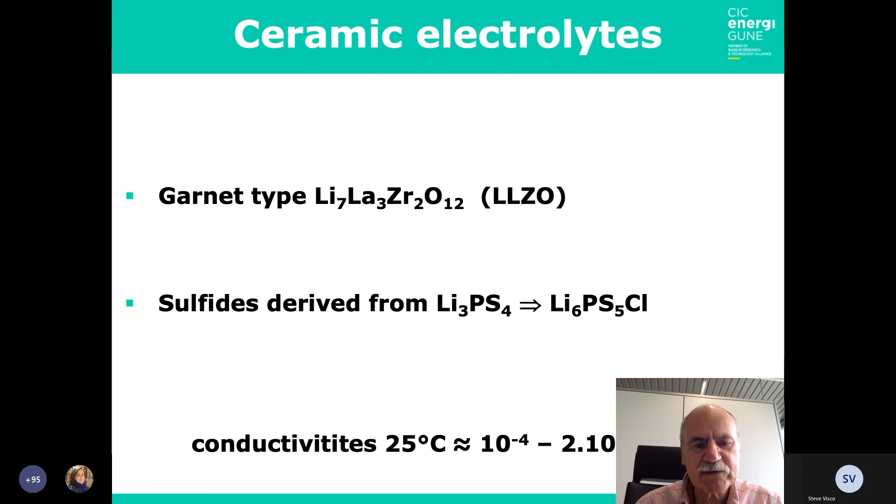Ceramic electrolyte can be garnet type, like the LLZO, which is zirconium, lanthanum, lithium oxide. And you have sulfide derived from Li3PS4, which is Li6PS5Cl, like argyrodite. The conductivity at room temperature of this electrolyte is quite high, between 10 to minus 4 and 10 to minus 3, possibly reaching 10 to minus 2 at room temperature.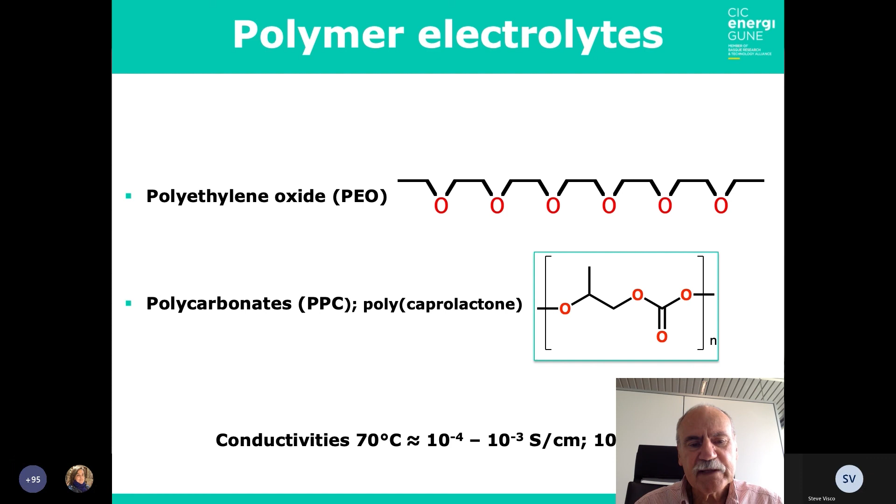Polymer electrolytes, on the other hand, have their archetype with polyethylene oxide, which is highly solvating, or you have polycarbonates, polypropylene carbonate, or polycaprolactone, which is a polyester. These compounds have conductivities of 10 to minus 4, 10 to minus 3, only reaching that above 70 degrees to activate the motion of the polymer chain. The conductivity at room temperature is closer to 10 to minus 5, 10 to minus 6, so not usable for practical operation.

A solid-state system is not a view of the mind. In fact, there were cars on a program called Autolib, 4,000 cars on a pay-and-ride basis in Paris between 2010 and 2019. These cars had a 250 kilometer driving range, a C/4 charge rate. And also buses made electric with polymer batteries, which are running in the streets of Paris and Melbourne now.

Safety again - I showed you the cars running in Paris, and we have vandals there. They set cars on fire for fun after being inebriated by alcohol on a Saturday night, and they set fire to Bolloré electric cars, and they burn effectively. What is absolutely impressive is that the battery is intact after the car has been burned. In fact, the battery can be recycled and reused in a new body of a car.

If you want to improve on this situation, try to decrease the operating temperature. You need to increase the conductivity at lower temperature. You need to increase the fraction of the current which is carried by the cation lithium, what I call the T plus transport number, and you need to keep the processability.

For this, we thought of using copolymers to increase the conductivity, and the idea is to take a sturdy CC backbone polymer that would be resistant mechanically, to oxidation and reduction, which are going to be present in the battery operation. To this you attach a flexible tether, which in this case is PPO, polypropylene oxide, and then at the end of the tether you attach another link of polyethylene oxide, a PEO-based material. This would be able to solvate salts, lithium salt or sodium salt, and move freely because of the flexibility of the tether, while you have the sturdiness of the CC backbone.

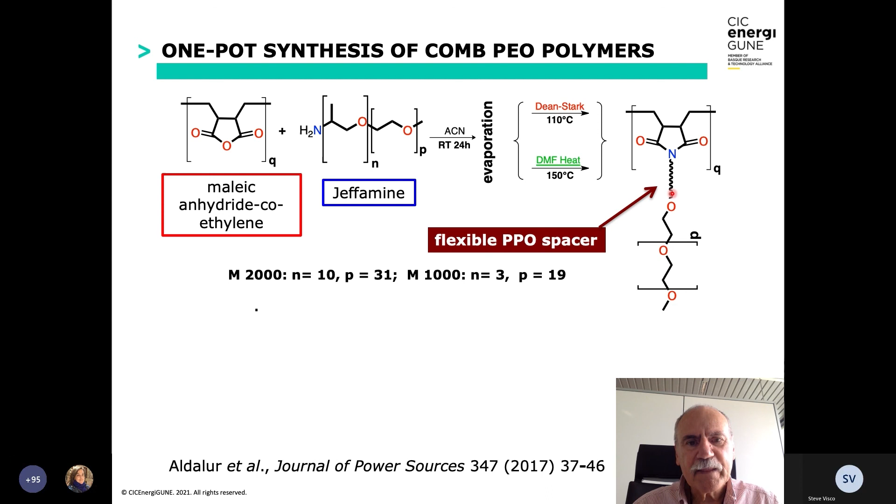This has been realized very easily, starting from maleic anhydride coethylene as the CC backbone, with Jeffamine reacting this oxygen onto the NH2, making a polymer with the backbone, a PPO flexible tether, and the PEO chain length in which you dissolve the salt. We can obtain the material with entangled chains, which would be a gel electrolyte with good mechanical properties, or a flowable liquid with untangled chains, which can be used to make good contact with the electrode.

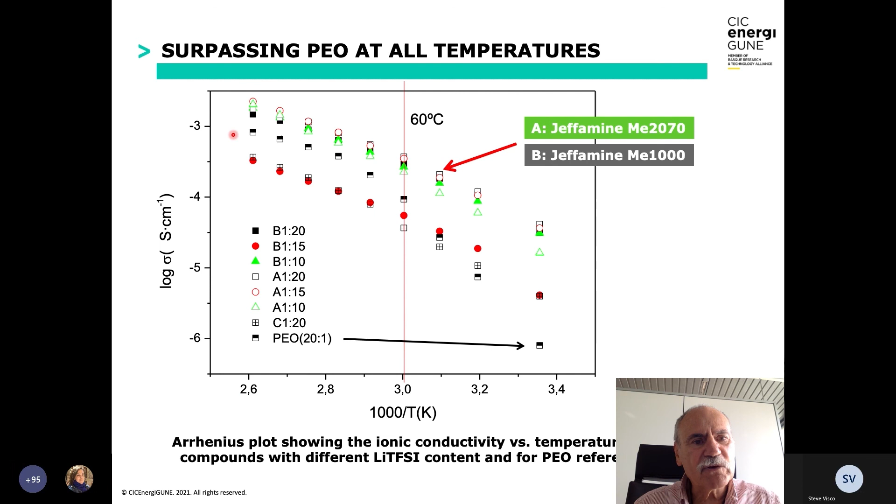The conductivity of these materials is superior to that of PEO at all temperatures. As you can see, the red arrow shows these materials are more conductive than PEO at all temperatures. In fact, this allows us to build batteries. If you build a lithium metal solid polymer electrolyte, either PEO, which we want to compare with our Jeffamine polymer, with a phosphate, lithium iron phosphate electrode - if you have a conventional PEO LiTFSI battery, you cannot cycle the battery below 50 degrees. There is no cycling possible.

Of course, if you cool down, don't operate the battery, and warm it up, when you reach 70 degrees again, the battery is not degraded and can operate. If you use a gel polymer, even if you cool down the temperature, you lose capacity, but the battery is still operative down to -25 degrees, though at a low fraction of utilization.

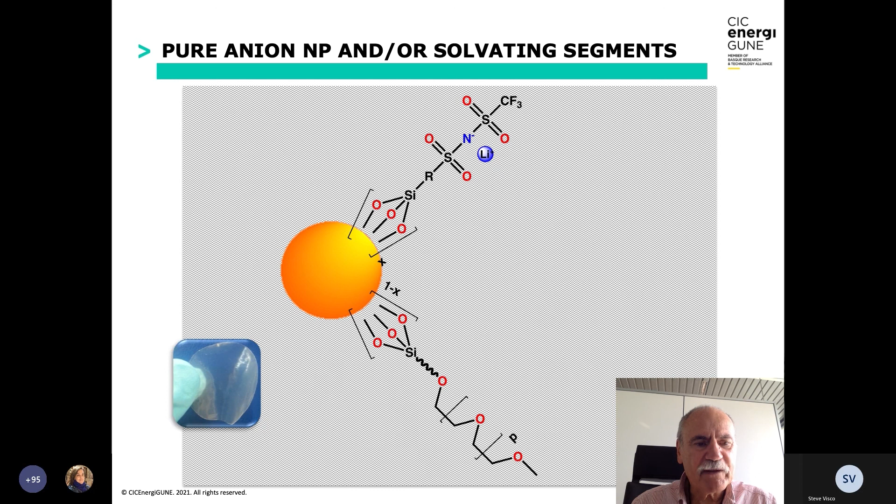For solving this problem, we imagine taking a nanoparticle to graft the negative charge of the salt onto it, grafting some PEO chains to make it more compatible, and immersing these nanoparticles into a PEO matrix. You obtain very nice, mechanically sturdy membranes which can conduct lithium quite well. In this case, the conductivity is due only to lithium, which is the only mobile species. The LFP lithium battery cycles quite well with the nanoparticles, with a membrane of 50 microns.

Let's go to the second action we take to improve the polymer electrolyte: modifying the salt. Usually the solute used in polymer electrolyte can be tethered, but if you use a discrete salt, this salt is likely to be TFSI, CF3SO2N SO2CF3. We imagine replacing part of this fluorine atom with protons.

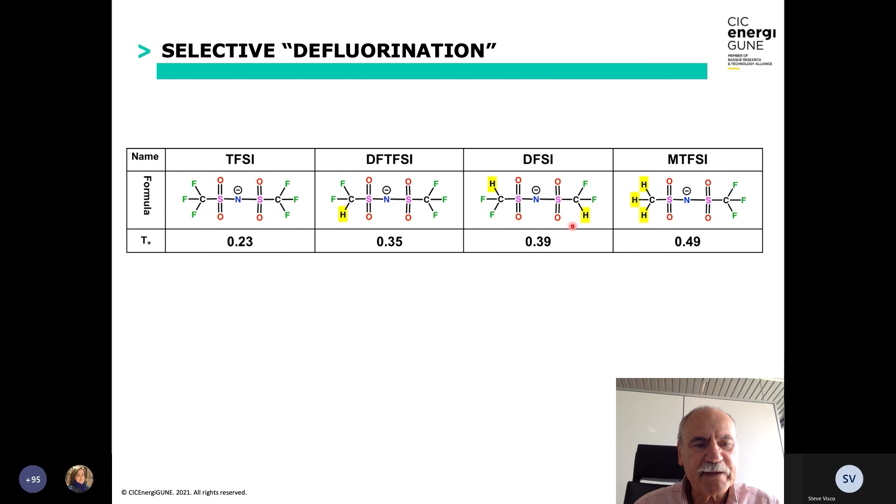Starting from 6 down to 3 protons being added, replacing fluorine in the material. We imagined this could create hydrogen bonds of the salt with itself or with the polymer, and that the transport number, which is only 0.23 for plain TFSI, would become much higher, which is indeed the case. These new salts have transport numbers markedly higher than plain TFSI.

Why is it important? Because the sand time, the time before you deplete your salt and dendrites start growing, is proportional to the square of the transport number. So every time you gain in transport number, you gain in current or cycle life of your battery.

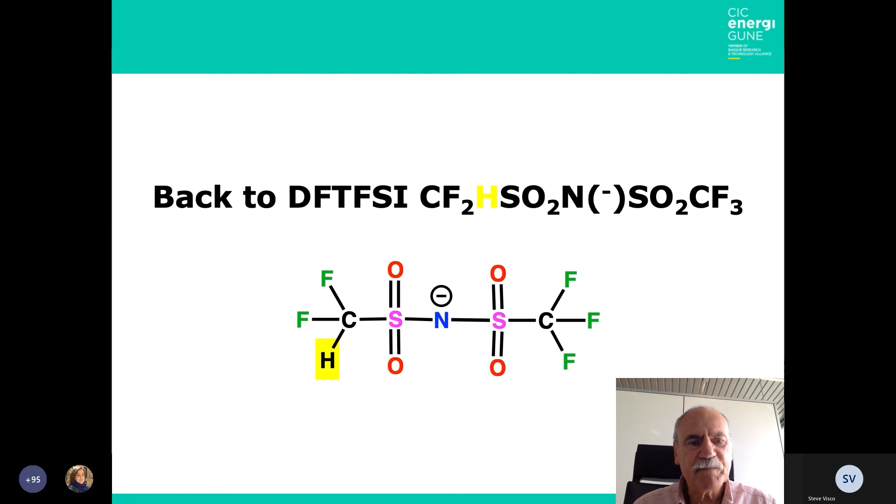Let's emphasize this salt with one proton replaced, which we call DF-TFSI, difluoro-trifluorosulfonimide, and look at its favorable properties compared to all the salts shown in the previous slide. The DF-TFSI with one proton replaced is in fact very prone to give a very good SEI.

If you make a lithium cell with a PEO membrane and cycle it, with TFSI you only cycle lithium for 200 hours. But you can go to 600 hours with a PEO LiDF-TFSI membrane - more than 3 times longer lifetime with this salt.

It's even more apparent when you use DME to be able to see the surface of your lithium. The liquid after 1000 cycles still works, while the TFSI liquid electrolyte grows dendrites and goes to short circuit within less than 50 hours.

And effectively, if you plate lithium onto copper using DME, because you want to see this lithium, with LiTFSI it is quite dendritic and discolored, and you can see the porosity of the dendrite. If you plate lithium from DF-TFSI, you can see a shiny, smooth membrane of lithium deposited. So the SEI that this salt gives is far preferable to that obtained with conventional LiTFSI.